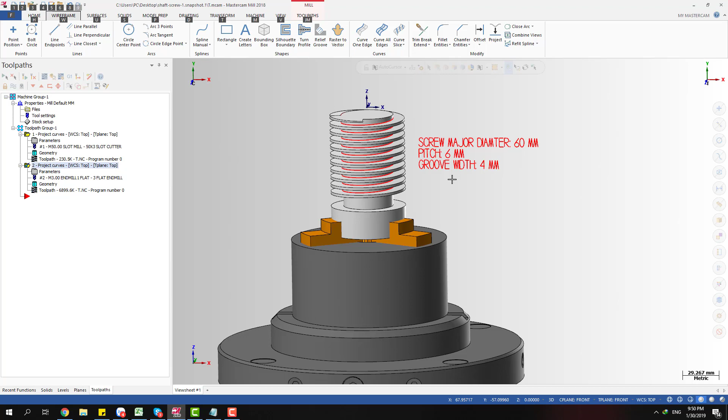Today I have a new idea and I found it is quite interesting, but I still haven't got a chance to test it on a real machine, but I hope I can do it later. In the video today I'm gonna talk about a new way, a new method to rough cutting a screw shaft. Yeah, you can see what I mean.

A screw shaft is something like this. It's like a conveyor screw or something. A screw shaft with a very fine pitch compared to the shaft diameter, like this one on the screen you can see. And here's some information about the part.

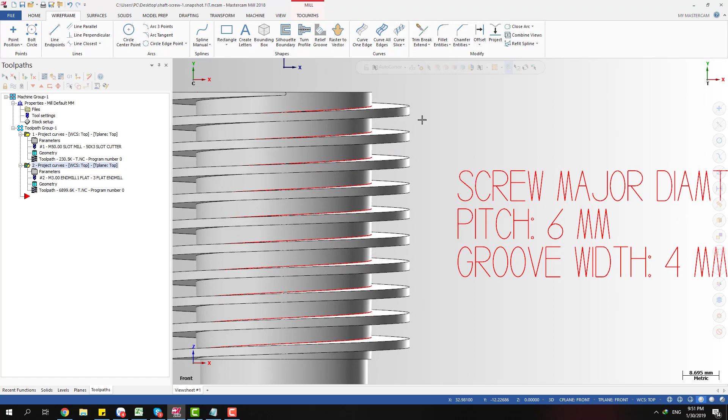The major diameter of the screw is about 60 millimeter, and the pitch is 6 millimeter, and you can see the width of the groove here is about 4 millimeters. So we got 2 millimeter thickness of these fins. Okay.

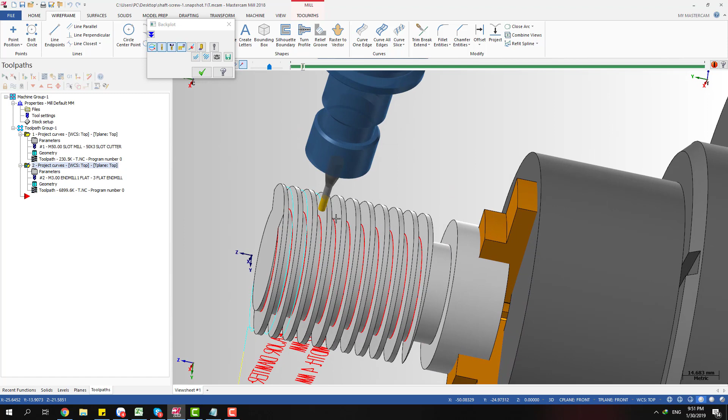And with a part like this, I used to rough cut with a rotary toolpath and using a flat end mill, a flat cutter like this, very small end mill for roughing the part. I use a rotary toolpath like a project curve or a swarf milling or something like this, and I rough it with a flat end mill, and I realize it's pretty slow.

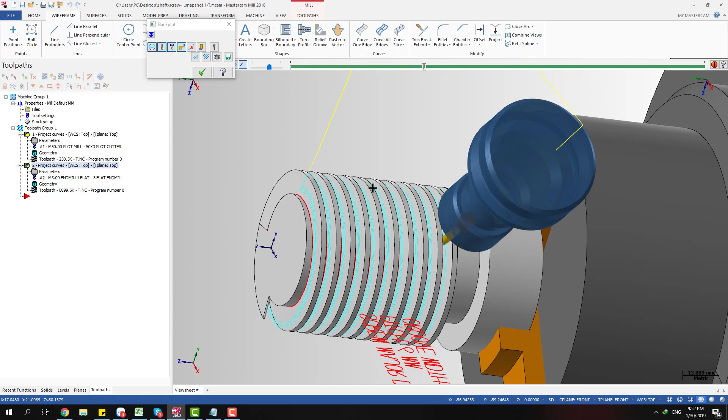It takes a lot of time to rough because you can see we use a very small tool to get into the deep groove here, and the chip extraction is not so good, so you cannot run so fast with this kind of slot. And you can see here I go quite slow, and I use multiple depth of cut in order to rough this slot, rough this screw shaft.

And sometimes I got the tool breakage, or yeah, something like this. If I go too fast or the chip cannot escape, the tool gonna break and you don't like it, you have to run from the beginning or something like this.

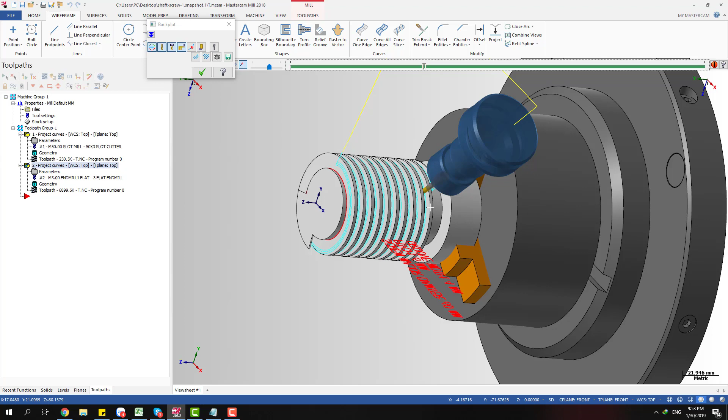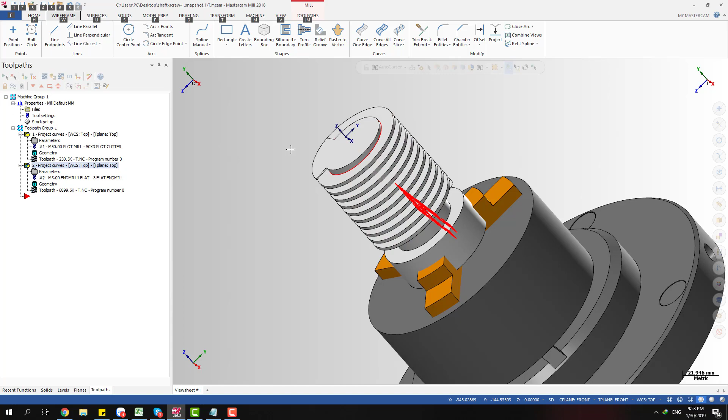And one day I just think about using a bigger tool, another kind of tool, so I can machine it much faster. So I think about the slot cutter, a T-slot cutter, because I got one in the workshop, but I haven't used it for this kind of job. So I think about using a slot cutter. It looks like when you do a thread turning, yeah, something like this, a little bit different.

You can see there's something special on the screw shaft here. The depth of the groove is quite large, so you need to go quite deep in order to reach the bottom of the shaft here. Yeah, the minor diameter, I call this the minor diameter.

And I make some trying, or I do some playing on the part, and I found something pretty nice I want to show you. If I have a chance to run this on a real part, I'm gonna show you if it's a success, if I got some success. Okay.

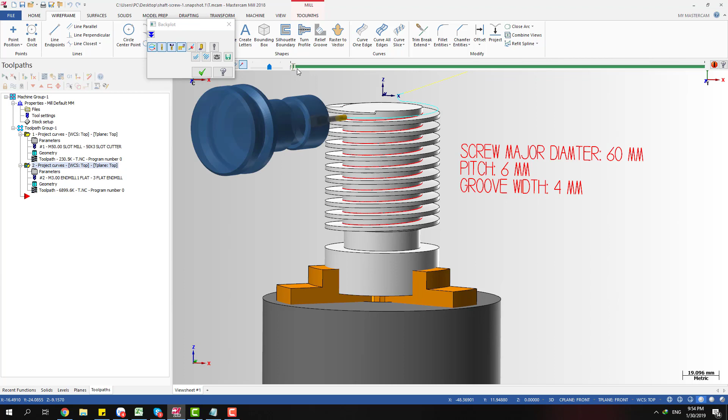You can see this is the first toolpath I rough with the flat end mill. This is a 3 millimeter flat cutter. Okay, the 3 millimeter, and machine with the rotary toolpath. You can see the project curve. Okay, and it's gonna look like this on the machine. I forgot to tell you, I use a 5-axis machine to machine this part.

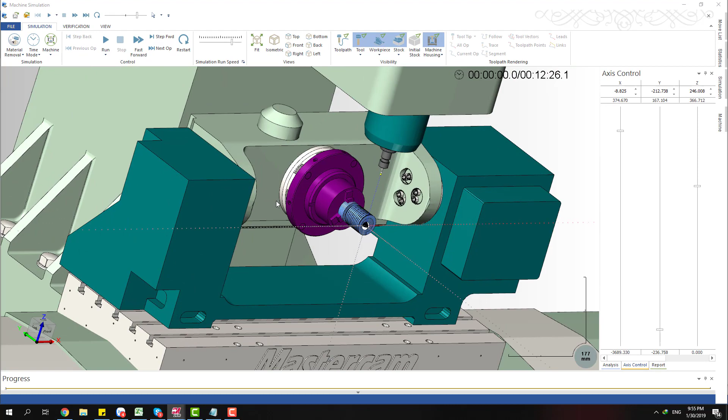Okay, and when it goes on a machine, it will look like this. I'm gonna show you. Okay, so when I use the 5-axis machine, the part will look like this, and when I use the flat cutter, a 3 millimeter flat cutter, it will cut like this. I will slow it down so you can see. Yeah, this is how it's rough.

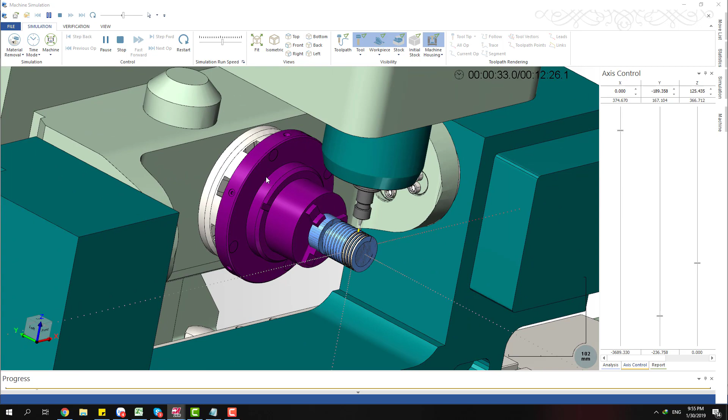You can see the A axis is fixed, and only this is the B axis for this machine. Yeah, and this is the B axis. It's not a C, it's the B axis, because of this machine, so this axis B is not important. Whatever. But you can see how it cuts, multiple depth of cut, very slow on feed rate.

You don't want to go too fast because it can cause the tool to break. Yeah, this is multiple depth of cut with a flat end mill. You can see the total machining time is about 12 minutes. Yeah, this is pretty slow, or even slower.

This is 1mm depth of cut. You may want to reduce the depth of cut to 0.5 if you get some trouble. So it takes a lot of time, and the tool is easy to break.

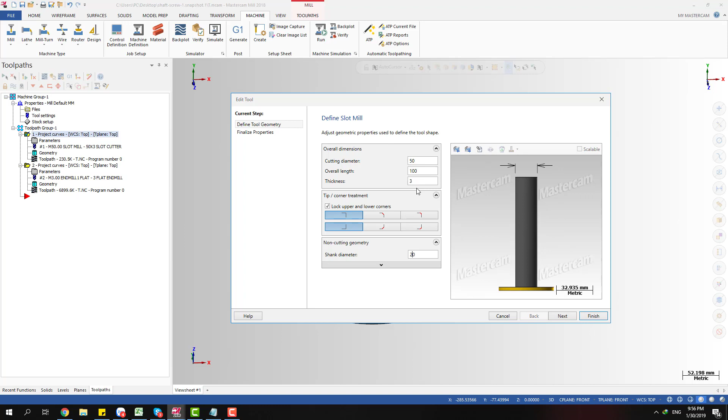So I decided to move to another way. I got a slot cutter like this. You can see this is my slot cutter with the diameter of 50mm, and the thickness is 3mm. You can see the thickness is 3mm, and the shank diameter is 20.

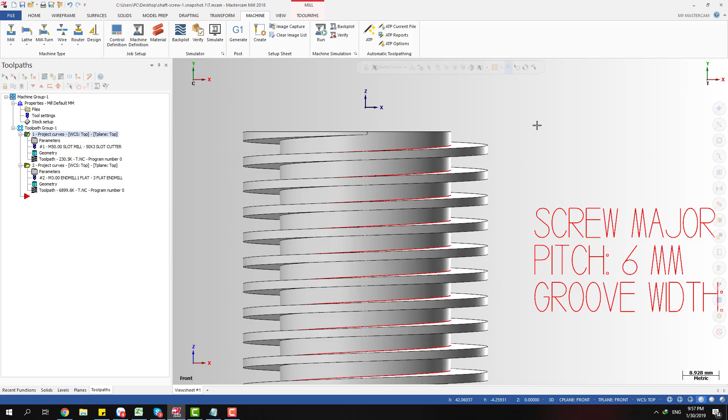When you look at it from the front here, you can see the width of the groove is 4mm. Yeah, from here to here is 4mm. So in theory, I can use a 3mm thickness tool for going into this groove.

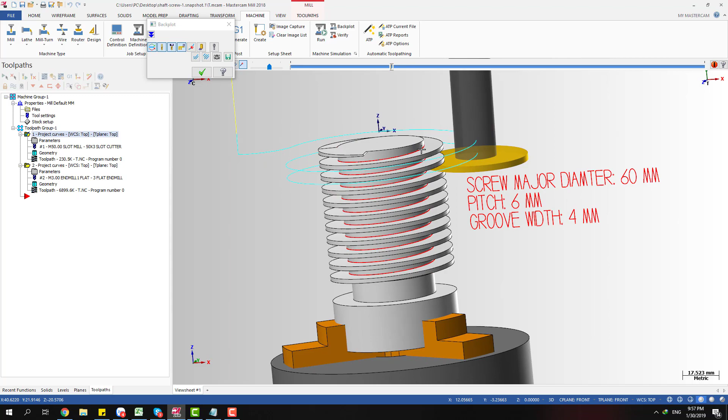Yeah, you can see my idea will look like this. You can see I use a slot cutter, much more rigid, and it has a better ability of chip evacuation. So it's very good for this case if it works. Yeah, and you can see because the thickness of the tool is 3mm and the groove width is 4mm, that means I can cut this screw with this tool.

You can see when I look from the front and the tool goes to here, you can see the tool is a little bit tilted, it's not straight to the Z axis. You can see this is the Z axis, and you can see the tool is a little bit tilted to the Z axis.

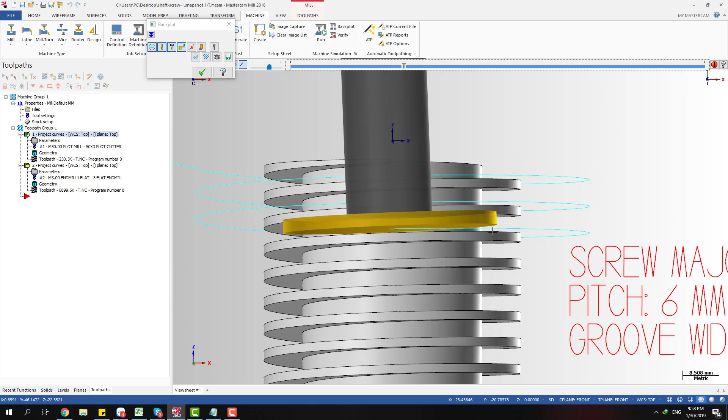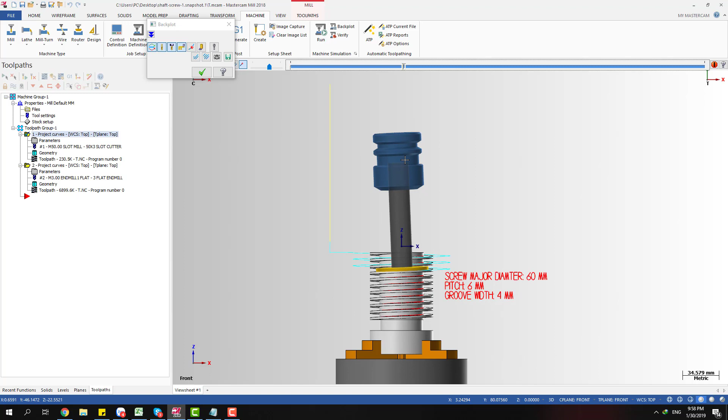I have to tilt the tool because if I go straight, the tool can gouge the part, because you see this is a helix, and if the tool is not tilted to the helix, it's gonna have some interference when the tool cuts into the plate here, so you don't want it. So that's why I have a tilting on the tool like this. You can see this is the tilt angle. Okay, and I will show you how to calculate this tilt angle later.

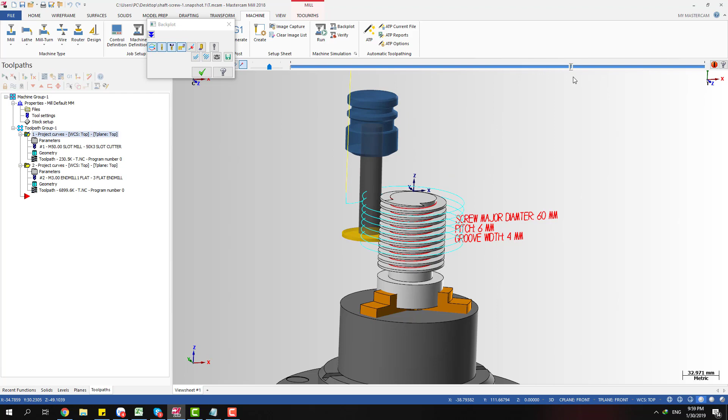And this is how the T-slot cutter cuts into the part. You can see the tool is much bigger, so it's more rigid, and I think it can cut at a higher feed rate, no tool breakage, and better chip evacuation like this. Yeah, of course you can use multiple depths of cut with this kind of tool.

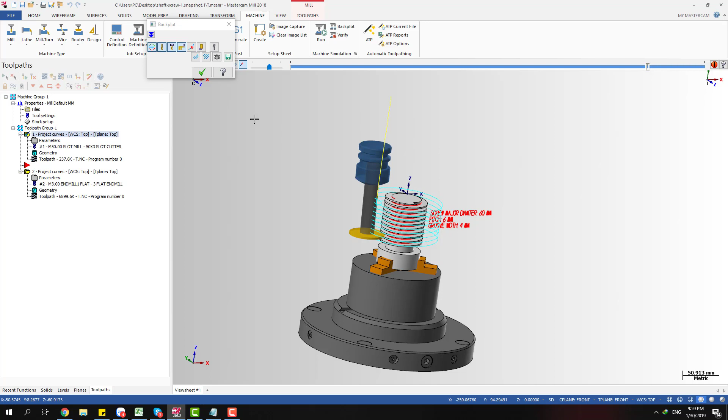Like this. For example, I use a rough cut with the cutting side offset of 5mm. Okay, and you can see this is the rough cutting. The tool goes around and just goes outside. It cuts a little bit here, and you can go multiple passes until you get the full depth of the groove. Yeah. So this is how it cuts on the machine. I'm gonna show you.

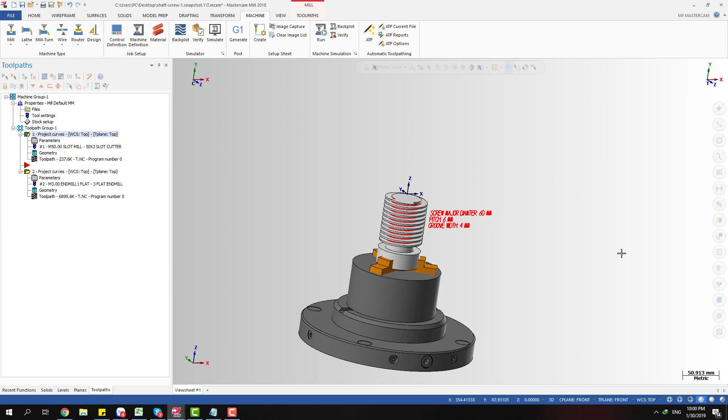I think this tool is much better than the flat 3mm, but as I told you, I haven't got a chance to test it on the real part. So if you have a part like this, you can try this way. I think it's quite good. Okay, and this is how I cut it with the T-slot cutter.

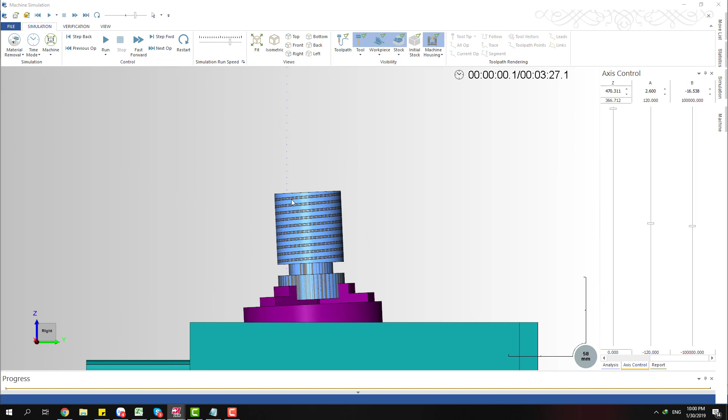You can see this is the axis of the machine. The A axis is 2.6. Yeah, it's a little bit tilted to the front. When I look, you can see it's a little bit tilted to the front with a value of 2.6 degrees. And I want to fix the A axis. I just want to rotate the B axis, and this is how it goes.

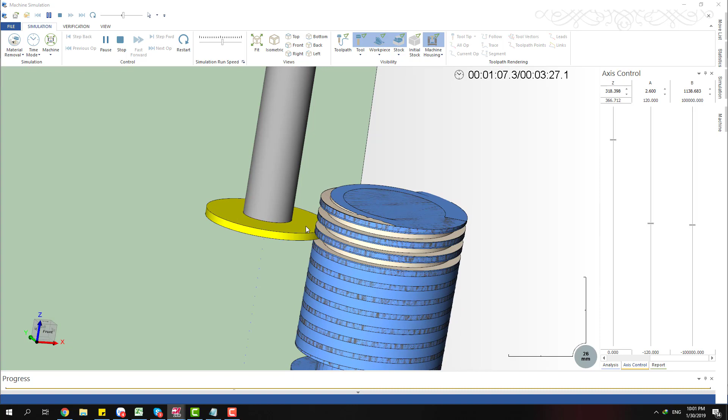Okay, you can see this is the rough cutting, the first pass, and the total machining time is just 3 minutes. Yeah, you can go faster with this kind of tool. Maybe you need 2 or 3 passes for roughing. I'm not talking about the machining time, but we have a benefit that the tool is bigger and you can avoid tool breakage with this kind of tool. Very good chip evacuation, and you get high cutting speed because the diameter of the tool is quite big.

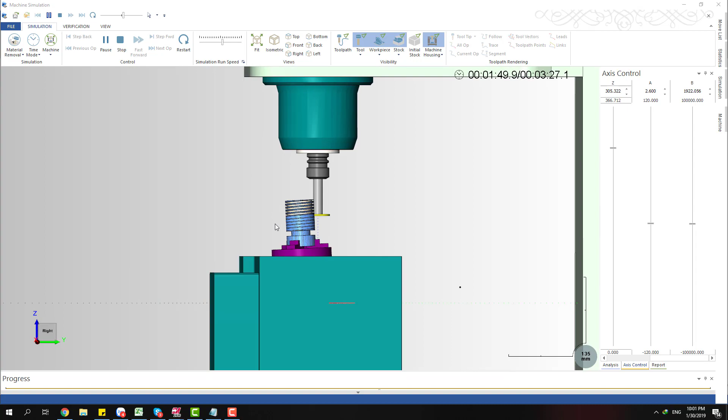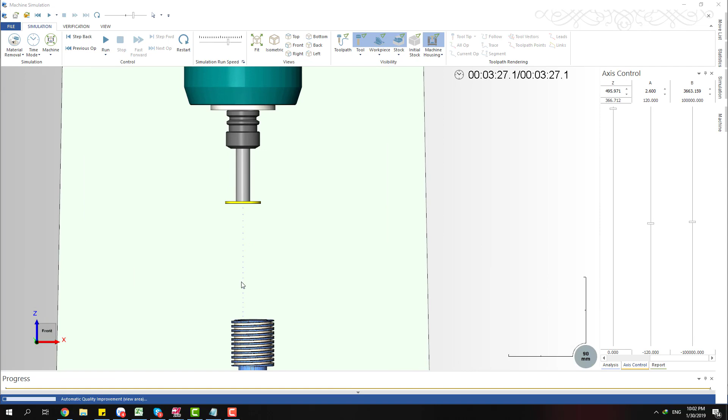You can see the A value is fixed at 2.6, and it just rotates the B axis like this. Yeah, the tool is fixed at a tilt angle like this, and you just rotate the B axis. It's pretty nice, right? I hope I can run this on my real part. It will be very nice. Yes, it's a little bit similar to thread turning, but in this case we tilt the tool a little bit in order to avoid the interference between the tool and our part.

Okay, so that's the idea for this video, and I'm gonna show you how I create this tool path and how I control the tool axis. Okay, first I'm gonna use a project curve tool path, and you can see this surface. I'm gonna use this surface to show you how the tool will go on the part.

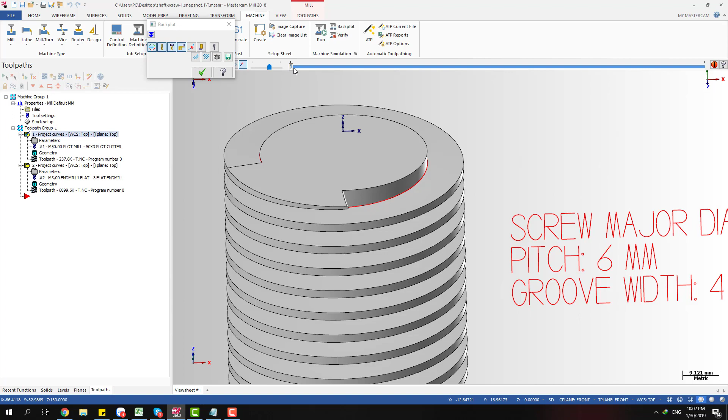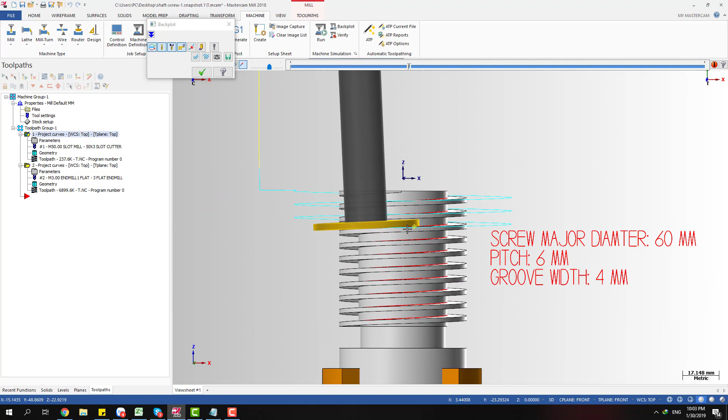You can see here the tool looks perpendicular, normal to this surface. This is the surface of the thread of the screw, so the tool is gonna follow this surface. Sorry, my English is not good, so I cannot describe it clearly, but I want my tool axis normal to this surface. I'm gonna create a tool path. Okay, in this case I use Project curves.

Alright, and I select my slot cutter, and in the projection I'm gonna select the curve here. I want the tool to follow this curve. You can see this is the helix. It's on the minor diameter of our part. Okay.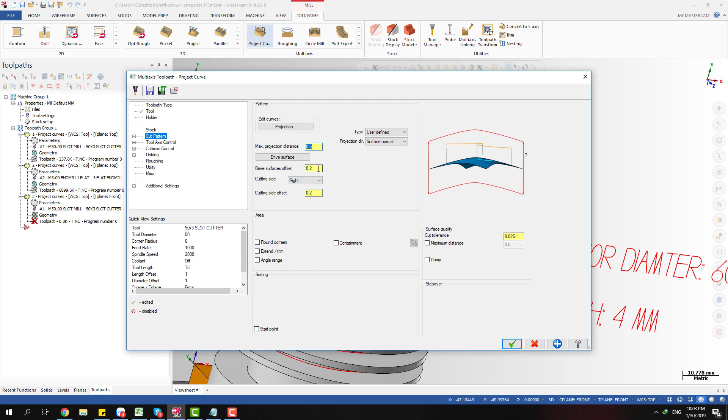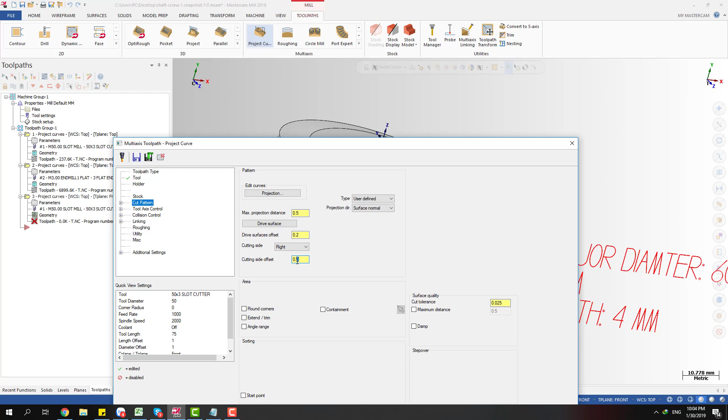And for example, I want to leave 0.2 stock on the part because this is a roughing, and this is the cutting side offset. If you don't want to use multiple passes, you can leave it, yes, 0.1. Okay, so if you leave it 0.1, the tool will follow this curve and only leave 0.1 stock on the wall here.

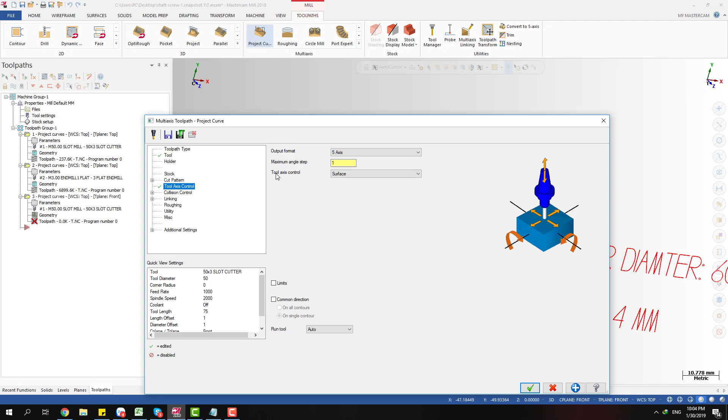So okay, there's one important thing, that's the tool axis. In this case I'm gonna select 5 axis, and for the tool axis control you have many ways to control the tool axis, but this one is very important. You want to select the right method for controlling your tool axis. In this case I'm gonna select surface. So with this method our tool will stay normal to the drive surface. Okay.

We're back to the cut pattern, and you can see we have drive surface here. I'm gonna click on this button to select the drive surface. The drive surface is the surface used to control the tool axis. Normally the tool will stay normal to the drive surface. Okay, I can select this surface.

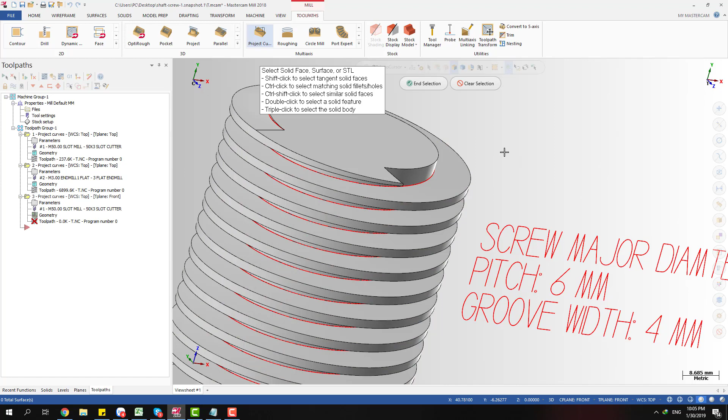You can see this one, but I don't want to select this because this surface is quite small compared to the tool diameter. So you may get some problems if the surface is quite small. If the center of the tool doesn't stay on the surface, you may get some problems and Mastercam will crash. So in this case, I create a new surface like this.

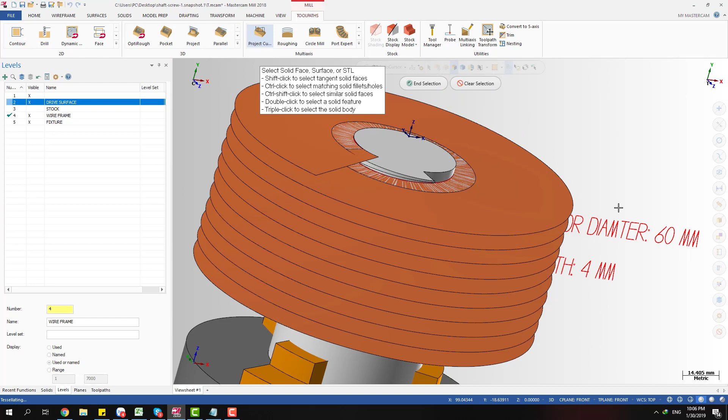Drive surface. Yeah, you can see it's the same surface. I just extend the surface to make sure that the center of the tool can stay on the surface, so Mastercam can do the calculation. Okay, so instead of selecting the small surface, I pick the big one here, right? So I just select the drive surface for the toolpath, and with this method, tool axis control surface, the tool will stay perpendicular, or stay normal, to this surface.

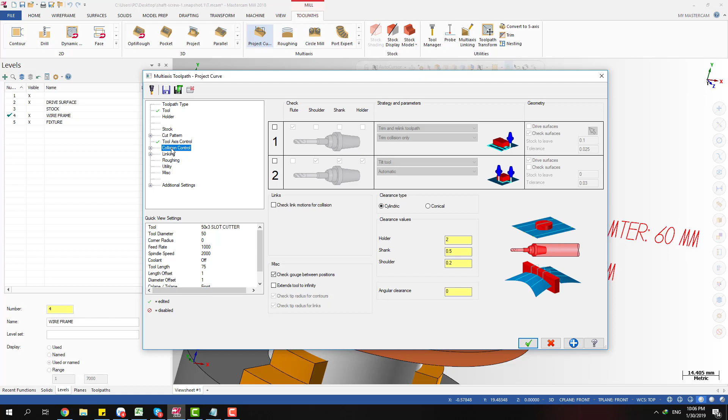Alright, and you can select the lead in and lead out for the toolpath. I don't have time to tell you everything here. I just want to show you how we control the tool axis and how it cuts into the part. Okay, and we check the plane, tool plane. It should be top for all planes here.

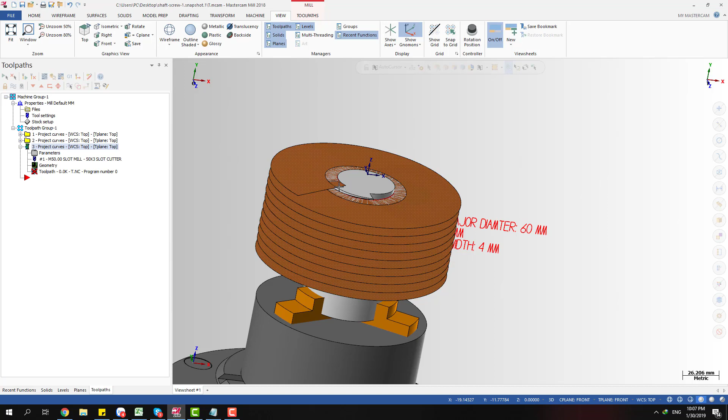If you see it calculate and it keeps calculating, then you did something wrong. It could take forever if you wait. Yeah, I think I have some problem with this toolpath. I need to close Mastercam and open it again, save it, and use the task manager to kill it. Okay.

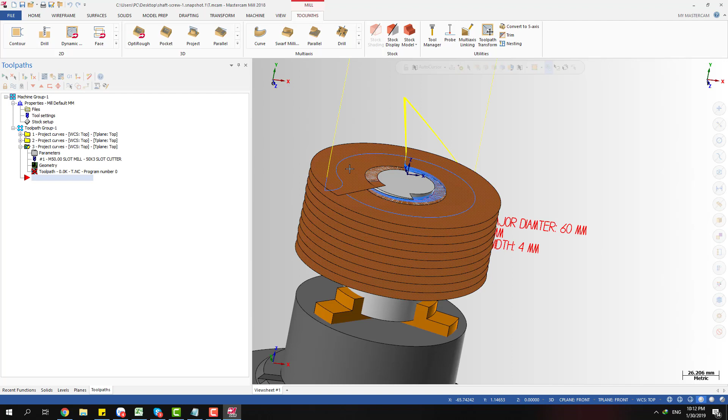Here we need to open Mastercam again and check if we have some problem with the toolpath, and we have to fix it. If you don't fix it, it will keep calculating forever. Okay, we open the part again. Woohoo! Yes, this one. I need to check the toolpath again to see if we did something wrong. I will hide this surface.

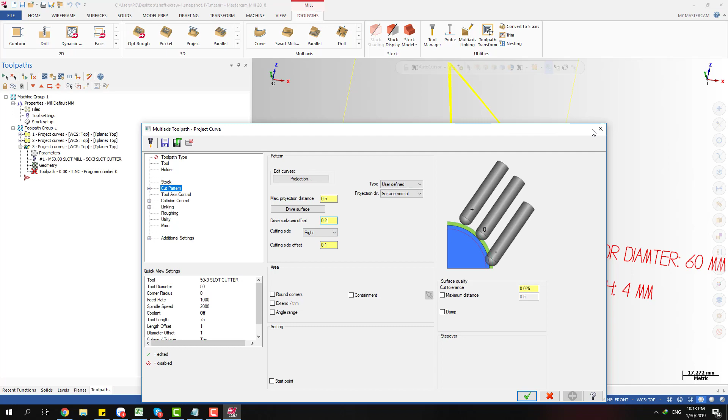Okay, and we go back to the toolpath, checking the cut parameters to see if we have any problem. Drive offset. Okay, cutting side right. Oh, I think I have figured out what happened. You can see here we select this curve for the toolpath, so the tool should stay on the left side of the curve instead of on the right side. So this may cause the problem. So I'm gonna select left side.

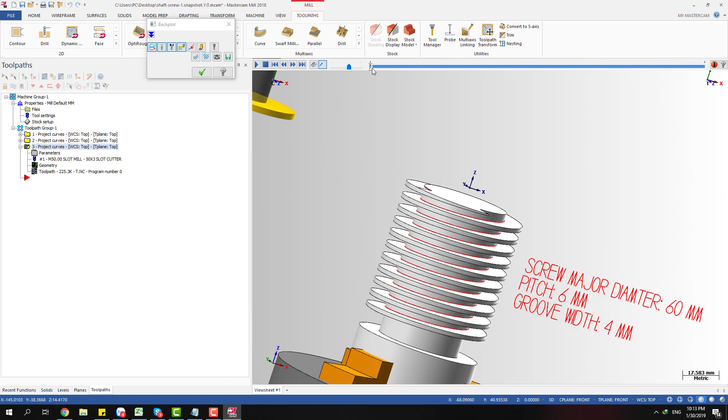Okay, and we're done. Pew! Yes. Whoo! It's done. Oh, you can see we have multiple depth cuts because in the roughing here I selected depth cuts, so I can remove it. Now run it again.

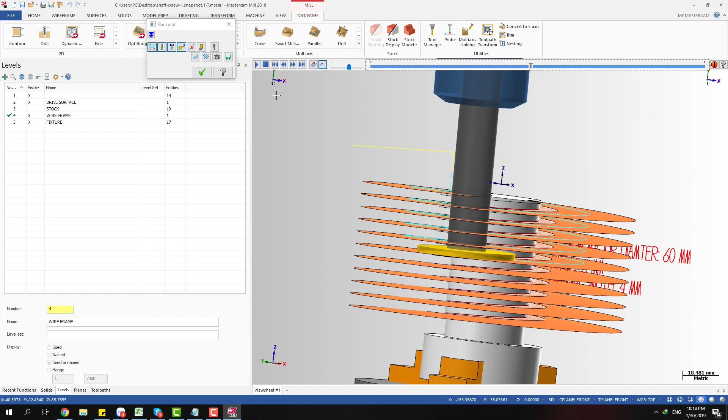Yeah, you can see we use this surface to control the tool axis direction, so the tool axis will stay perpendicular to this surface. That's why the tool will go like this, and because of this, we can avoid interference between the tool and the part, because it tilts a little bit like this. Yeah, you can see it's pretty nice, so we can do a rough cut.

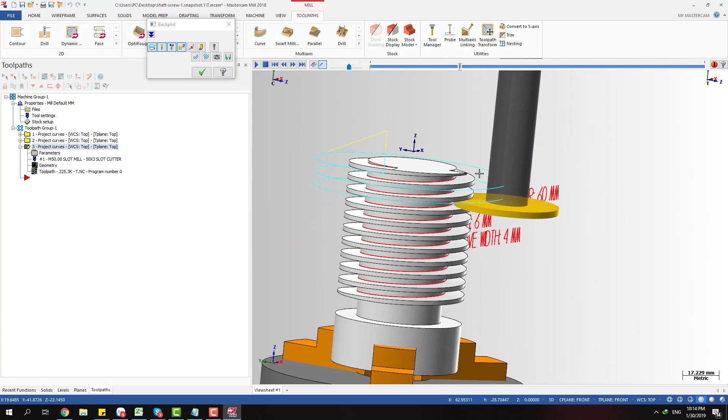You can see in the last try I used a roughing option with multiple depths of cut. For example, I use 3 depths of cut and 3 millimeter roughing, 3 depths of cut and 3 millimeters each depth. I'm gonna generate the toolpath again and let's see what happens.

You can see this is not what we want, because it's calculating the depth of cut in this direction, and the tool will hit the part. Yeah, because the depth of cut is calculated using the drive surface, so it will offset normal to the drive surface. That's why you can see we have multiple depths of cut in this direction, so it will hit the part.

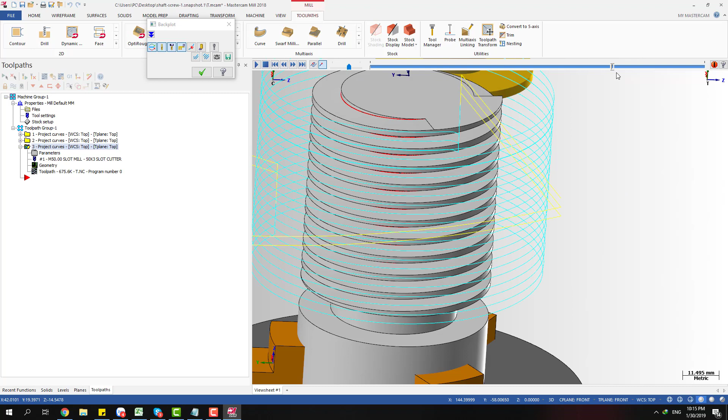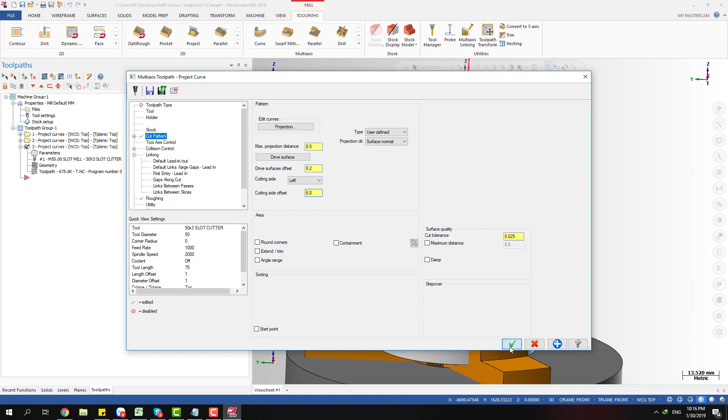I don't want to use depth of cut in this case because it will hit the part. Instead of this, I go back to the cut pattern and I use this option to control my roughing operation. So instead of using 0.1, I may leave 6 millimeter on the curve here. It's like the stock to leave on wall in the contour toolpath. You can see now I leave 6 millimeter from the flute of the tool to the wall here.

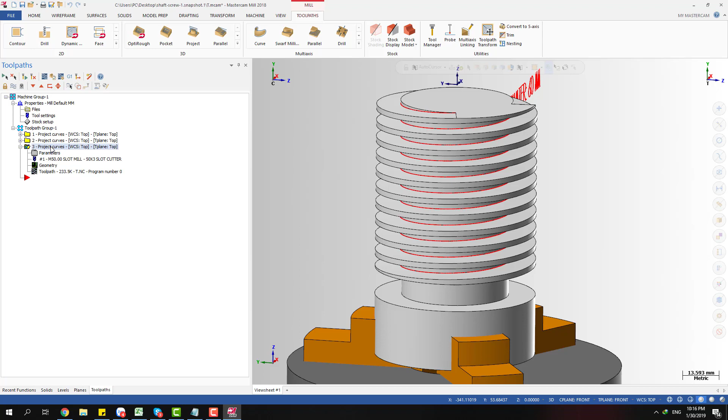So I got my first rough pass, and for the second pass I'm gonna copy another toolpath and reduce the value of stock to leave on wall here, for example 3 millimeter. It takes a little bit of time, but it works. And you can see with this toolpath I got something like this. This is the first pass and this is the second pass. It goes in this direction, so it doesn't hit into the part.

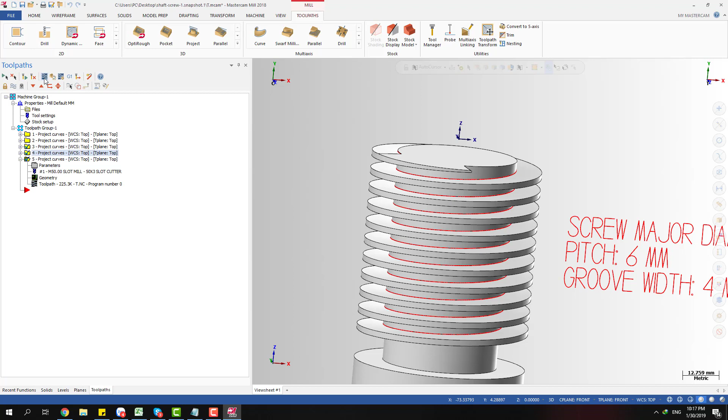And you can make another toolpath leaving 0.1 for finishing. Okay, so we got 3 toolpaths with 3 different values of stock to leave on the side of the curve, and this will go like this. We cut from the outside to inside instead of cutting from the top to the bottom. Okay, and this is gonna work.

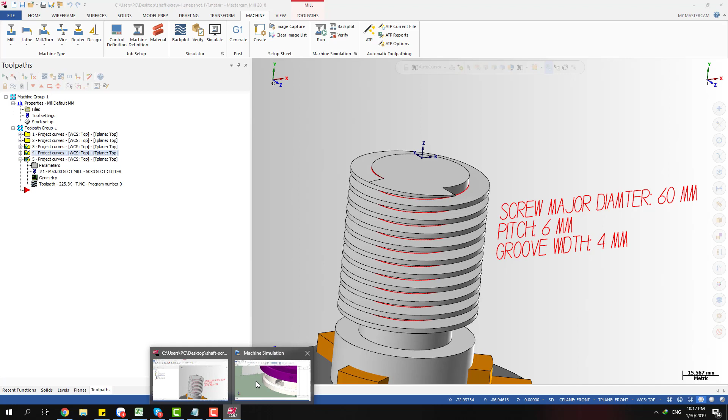Okay, now I'm gonna show you. This is my stock. I put the stock in level number 3. Let's see how it cuts on the machine. I use 3 different toolpaths for making 3 different depths of cut. This is the first cut. Go a little bit faster. You can see it cuts around the part, but let's take a look at this.

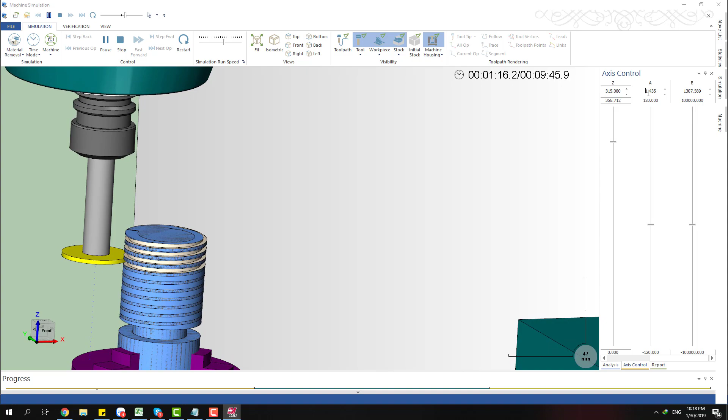This is the value of the axis. It's not fixed. You can see it's moving. It's not fixed. You can see it keeps running the axis. The B is rotating and the axis is tilting. You can see that the tool axis is not fixed and it's not so good in this case.

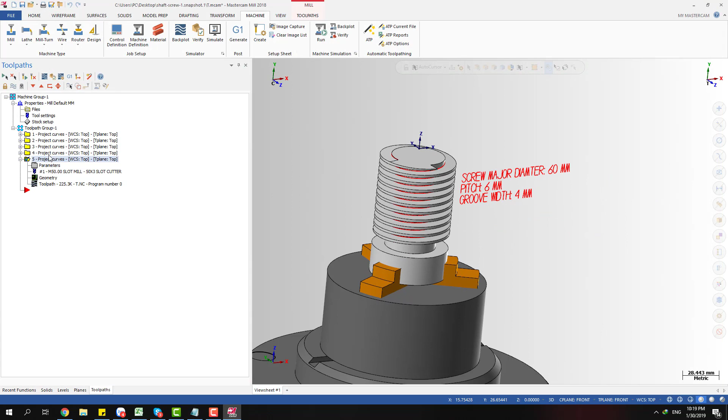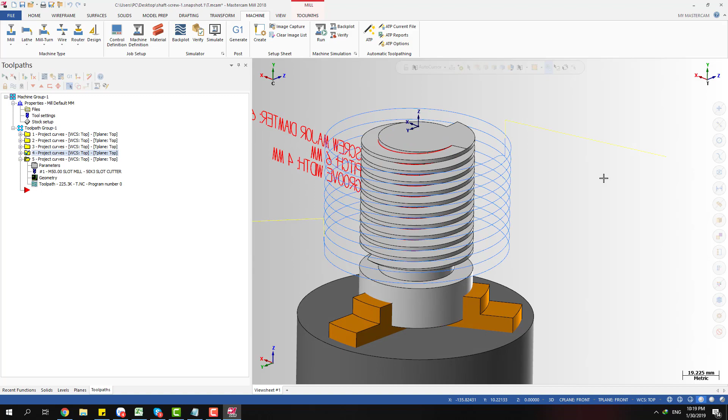And this is the second pass. You can see it cuts deeper into the part. We had some collision here. Take a look. This is called a collision. When it moves from here to here in the simulation, we can see the collision, but we don't care about it in this video. I just want to show you how we cut this part with the slot cutter. We can take care of the collision later.

It's not a problem. So you can see when I use the tool axis control with the surface option, the tilting axis moves a little bit. It's not fixed. So how can we make it fixed? I'm gonna use another way of tool axis control. Instead of the surface option, I select another one: fixed angle to axis. With this option we can keep the tilting angle fixed, so only the B axis rotates and the A axis is fixed. I think this is better for this cut.

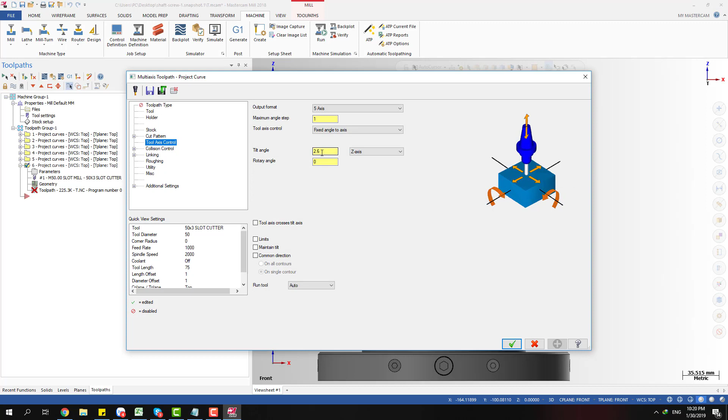In this case the tool will stay 2.6 degree to the Z axis. I'm gonna make it 0 so you can see the difference. 0 means the tool axis will stay parallel to the Z axis. If you input 0 degree, the tool will look like this. This is the tool axis. You can see it's parallel to the Z axis.

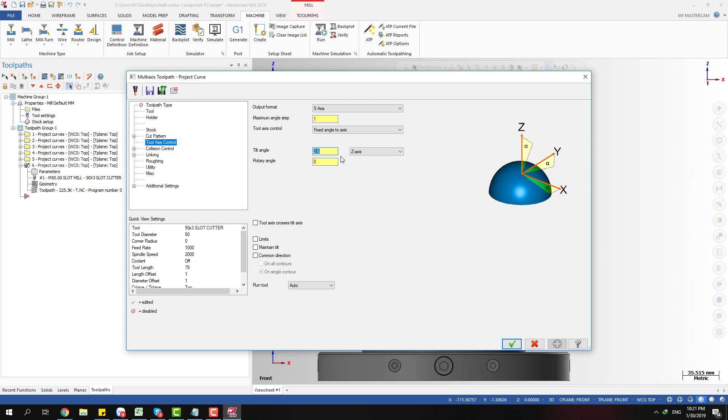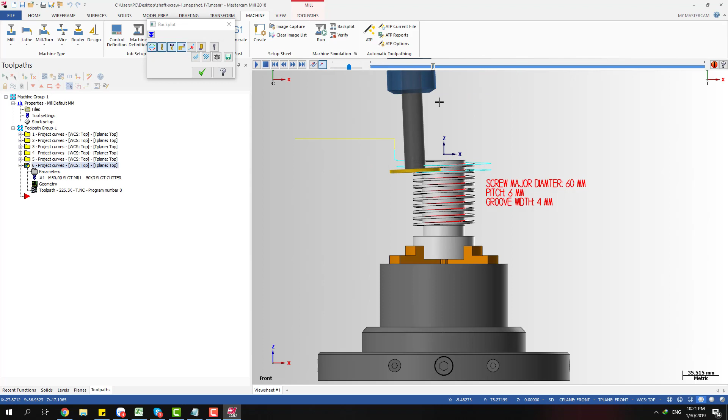And if you want a fixed tilting angle, you can input it. You may wonder how I know this value, why 2.6 and not a different value. I can try 45 degree so you can see it easily. This is 45 degree; the tool axis stays at an angle of 45 degree to the Z axis. And when I use 2.6 degree, we got an almost perfect cut. The tool follows the groove, follows the pitch, the helix angle of the part.

Very nice. So how do you know which value to input here for the tilting angle? It depends on the helix angle of the part you are making. So how do we figure out the helix angle of the part? Before I show you, I need to do a machine simulation so you can see how it cuts now.

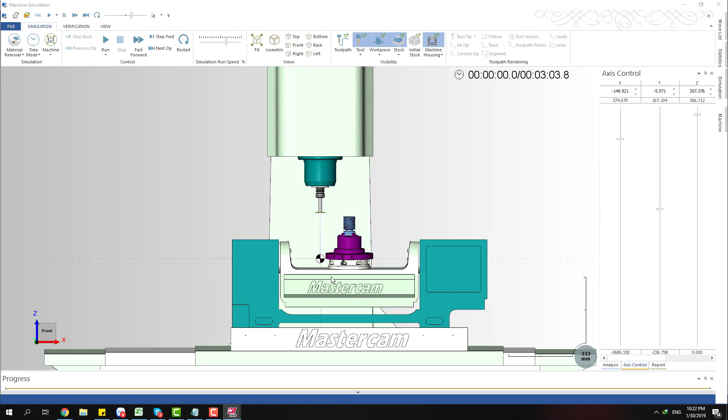Okay, so you can see now the A axis is fixed. It is 2.6, and we look from the right side. You can see the A axis is fixed now. Only the C is moving when it's cutting.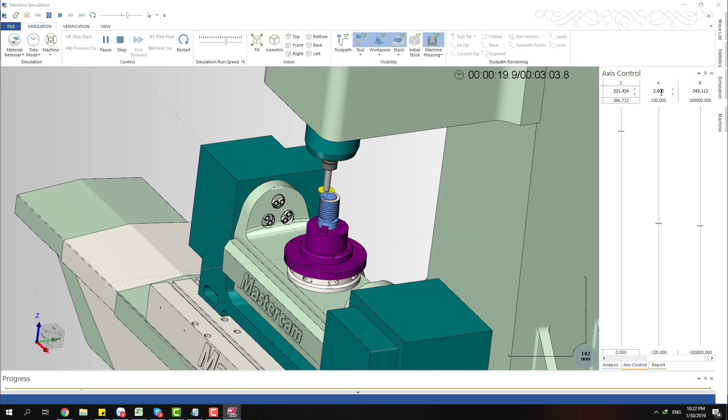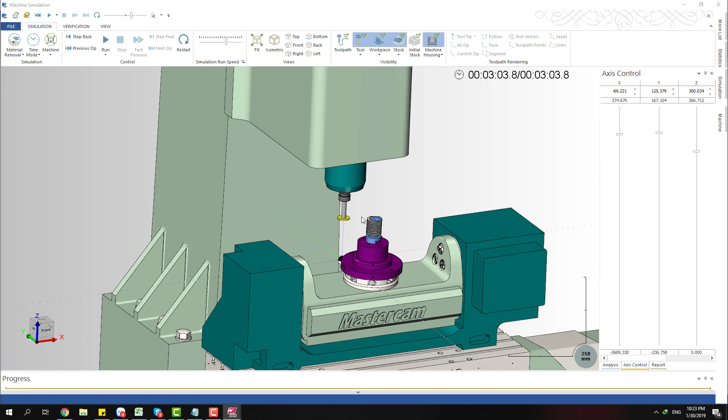Yes, and it's much better. You can see the A is fixed and the B is moving. Only the B is moving. Yeah, the X and Y is going a little bit, but I want to keep the A axis fixed. Only the B rotating. It's much better for the tool and the part. Okay, I think so. Let's go like this. Still have collision.

Okay, so that's how we control the tool axis with the fixed angle to axis option. Very nice. You can keep the tilting angle fixed, and you just need to rotate the part, and it will do the rest. It's similar to a thread turning operation, but in this case the tool is tilted a little bit, 2.6 degrees.

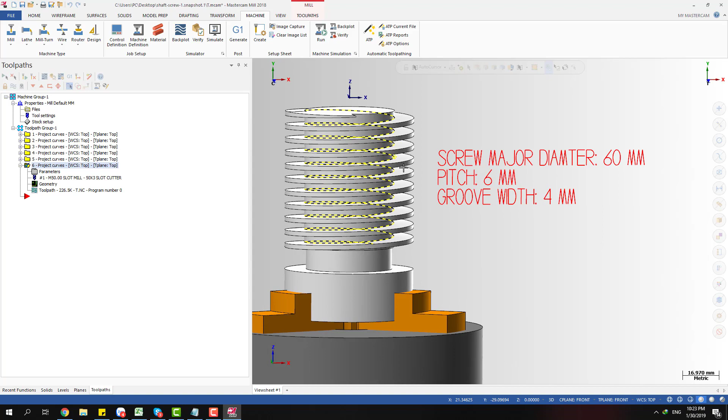So back to the topic, how we figure the helix angle of the part. You can do some hand calculation. Yeah, you have the diameter, because the curve here stays on the minor diameter. I have two ways to figure out the helix angle. Okay, so this is the first way. You don't need to do any calculation. You just do some trick. Go to the transform.

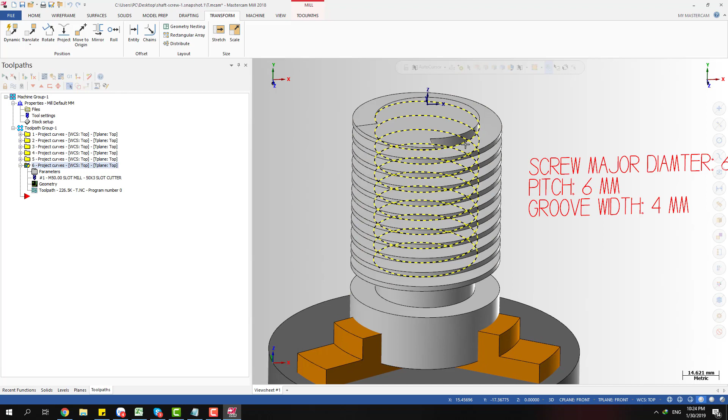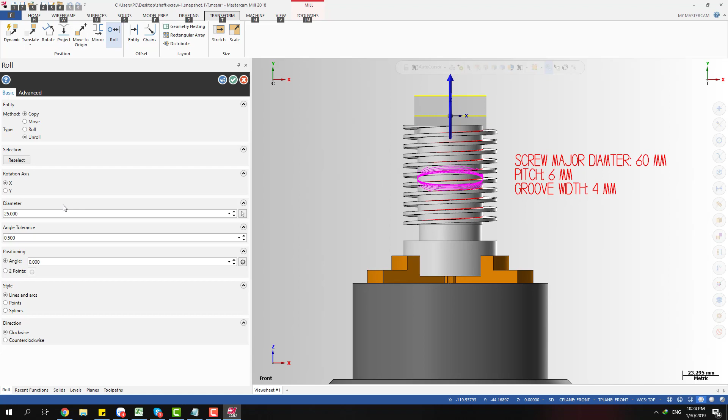You can see this is a helix, and we will roll it onto a flat surface so we can figure out the helix angle. We use the roll function here. I look from the front and I use the roll function. I select the curve here. Okay, I look from the front, and rotation axis is X. You can see we have a profile that is rolled flat on the flat surface, and you have to input the diameter of the cylinder where the curve stays on.

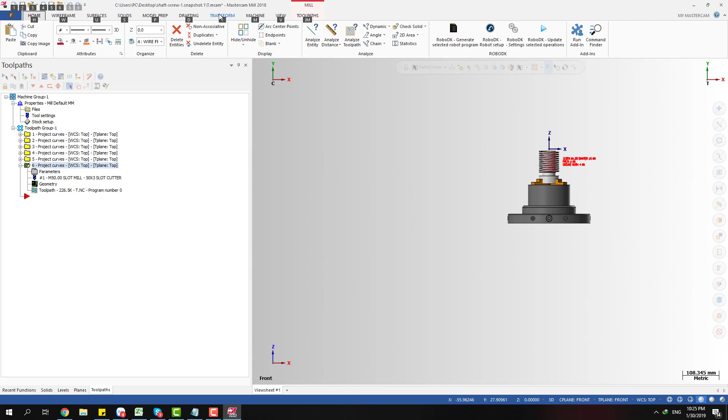So I'm back with the part. I have to measure this diameter first. Click on the dynamic. I need to measure this diameter. Click on this. So you can see the diameter is about 42 millimeters. Okay, so we're back with the roll function. Go to the transform, select rolling, select the curve. Okay, and we input

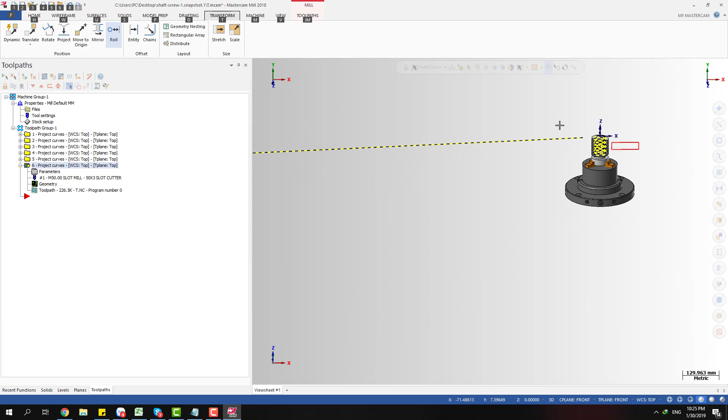42. Okay, so you can see the helix now is rolling on a flat surface, and we can easily measure this angle. So this is the angle of the helix of the part. You just measure it, go to angle and click this one. You can see the helix angle is about 2.6. So this is how I got the value of the helix angle. Very quick.

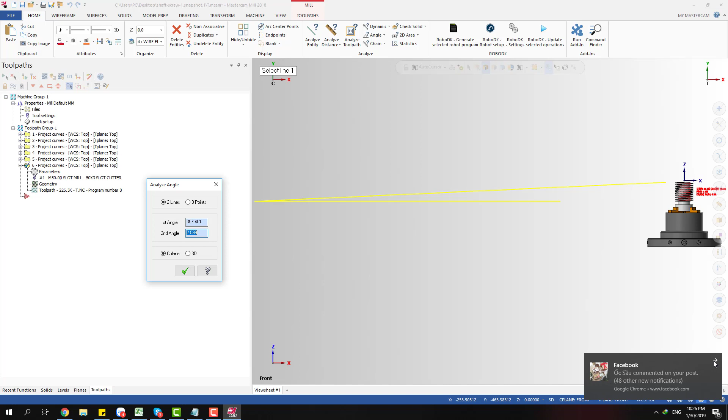Alright, so this is the first way we can calculate the helix angle of the part, and the second way we do some calculation, if you like calculation. Okay, first we measure the diameter of the cylinder where the curve stays on. Check the diameter. You can see the diameter is about 42. So I need to calculate the perimeter of the cylinder. We use the diameter 42 and multiply with pi. Okay, so this is the perimeter of the cylinder.

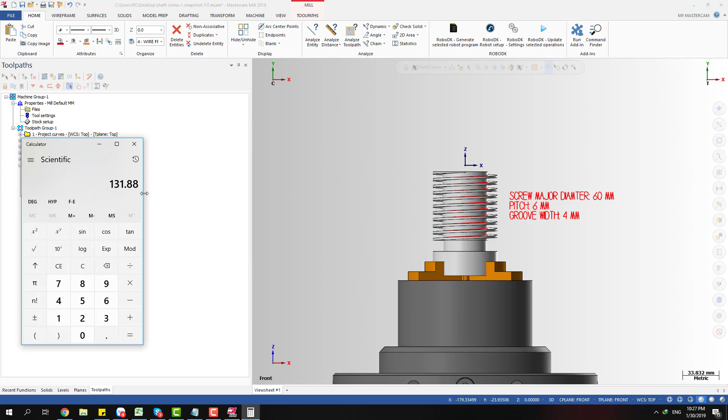So if we want to find the helix angle, we just divide the pitch of the screw by the perimeter of the part. So we're gonna take 6 divided by, I just forgot it, I calculate it again. Diameter multiplied by pi. Okay, 131.88, and we got it. Yes, and we got this value, so we copy this

and we go to Google, or if you have a hand calculator, it's okay. Okay, and I'm gonna put arctan of the value we just calculated. So this is the angle in radians, and you copy this value and convert it to degrees. You can see we got the same value, 2.6 degrees. Yeah, if you like calculation. Takes a lot of time.

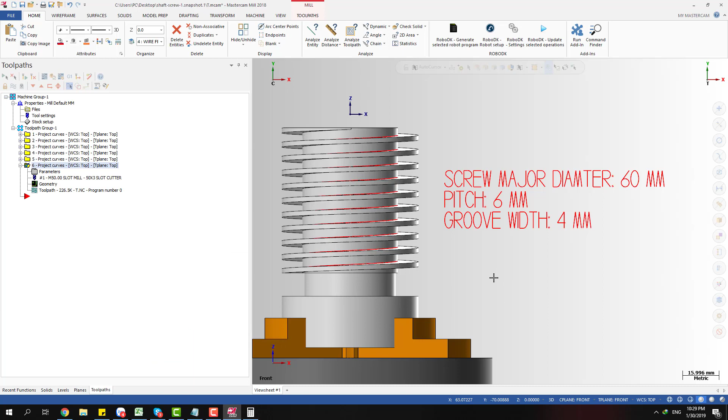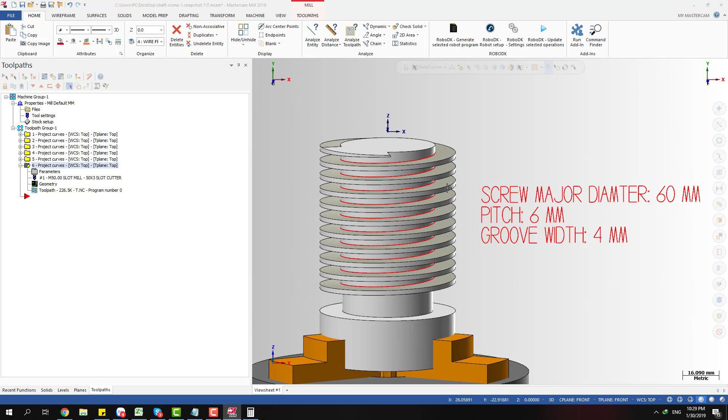First we calculate the perimeter of the cylinder. We multiply the diameter with pi, and after that we divide the pitch of the part by the perimeter. We got the tangent, and then we can find the angle in radians, and then we convert from radians to degrees. So we got 2.6 degrees for the helix angle. You can use two ways of calculating. That's why I got the value of 2.6. 2.6 is the correct value.

Okay, I'm missing the lead out motion, so it's going into the part. You can add the lead out motion. Linking, lead in and lead out, you should use lead out at the end of the operation. Okay, like this. Right.

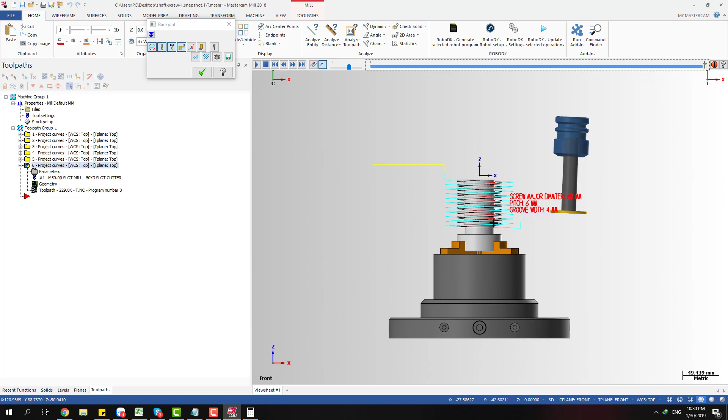So this is all for today. That's what I'm gonna show you. Another way we can machine a part with the T-slot cutter, and we use the correct tool axis control. We can make a very nice cut, and we can avoid tool breakage because the tool is now bigger and much more rigid. I hope I have a chance to test this method on a real part, and I'm gonna show you.